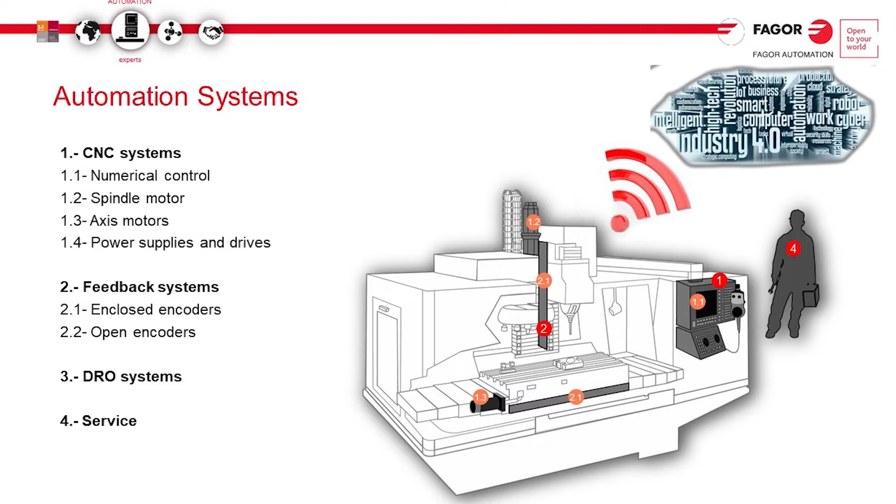But first, we wanted to further acquaint you with our organization. We are a proud member of the Mondragon Corporation, the world's largest employee-owned cooperative. We have been one of the leading providers for machine automation and control products for over 45 years. We provide CNC systems, linear encoders, angular encoders, servo drives and motors, and digital readouts, meaning we're one of the few existing companies to be a single source solution provider for both CNC controls, feedback devices, and servo drives and motors. While we have a worldwide presence, our automation systems are used by a range of American machine manufacturers that covers the entire scope of manufacturing in the United States.

Some of those applications include hybrid additive machines, mold making and deep hole drilling, multi-channel complex automation with 10+ axes, precision optical grinding, 5-axis high-speed milling, turning, and jig grinding, and laser cutting. Today, we intend to showcase some of the technology we've implemented to make some of these applications even more successful.

Now, here's Bob Miceli with advancements in control system technology. Well, thank you, Ryan. Today I'd like to talk to you about smart technology. What is smart technology? Well, smart technology is defined as a self-monitoring, analyzing, and reporting technology. It utilizes machine learning and artificial intelligence to optimize your process. How can this apply to control technology for machine tools in the aerospace, automotive, and medical and other industries? And how can it improve the process?

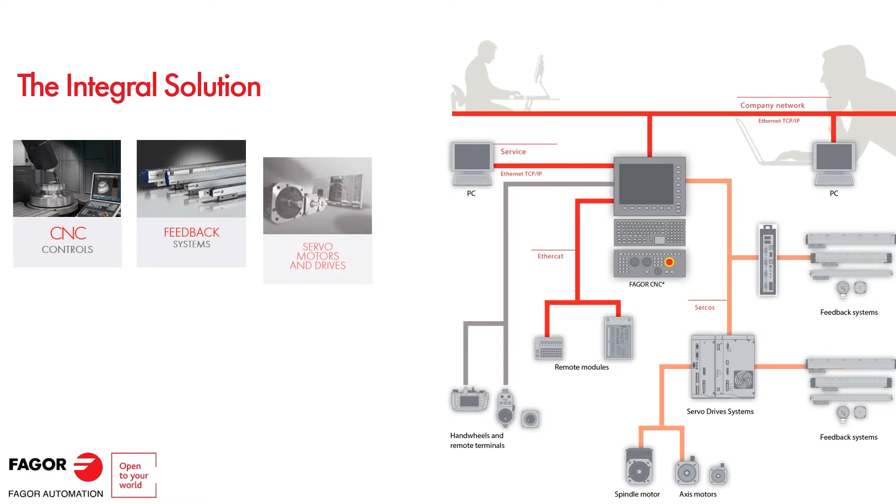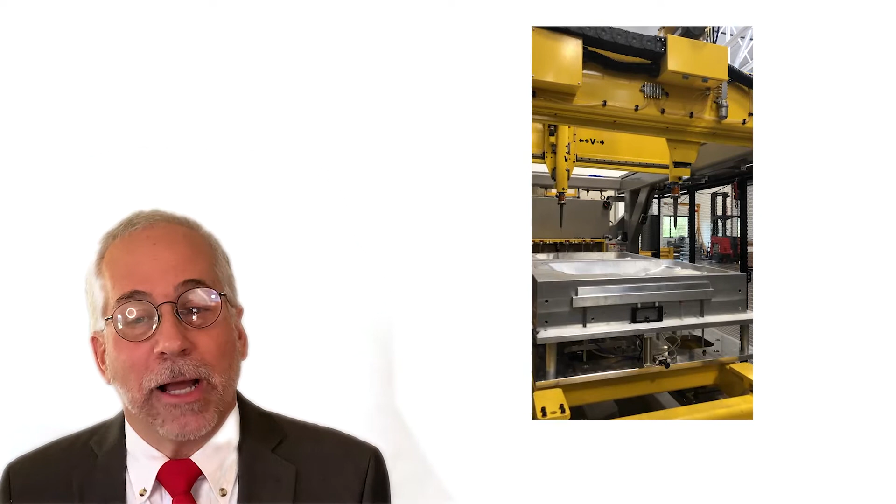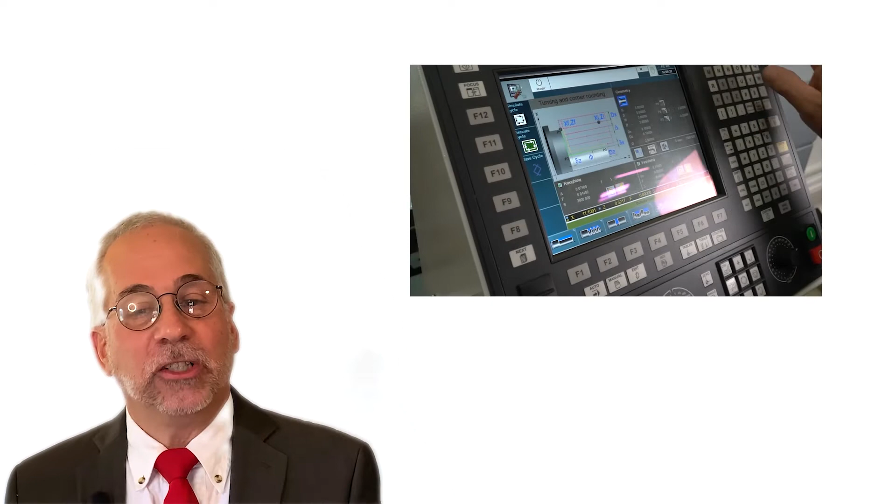Those of you already familiar with Fagor Automation know that we offer an integral solution for milling, turning, grinding, laser, and other general automation, namely by our large selection of features. Our CNC systems meet the most demanding requirements in the field, from production conversational programming applications to high-speed CNCs with nanometric accuracy. In other words, Fagor offers controls and software designed to meet high-speed machining demands for the aerospace industry to the high accuracies and fine finishes required by the medical industry.

But we need to take it further. How do we continuously work to exceed those needs? How can we put ourselves in a better technological position for the future? For performance, you need powerful hardware and software features. What do we mean by this? Well, in order to implement powerful software features, we must have powerful hardware to support it. Think about this: smartphones of today are more powerful than what your average PC desktop was a decade ago.

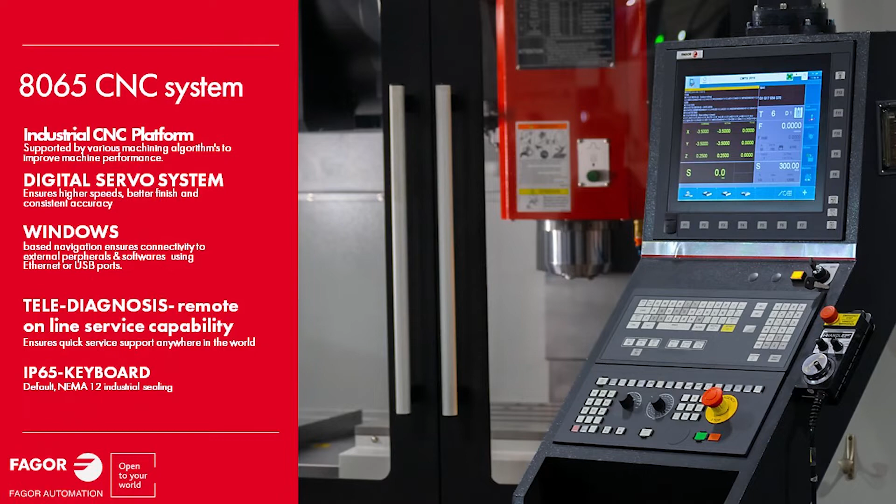Our flagship control, the 8065, has been redesigned top to bottom to a new platform. The Q7 platform is built with the current and next generation of manufacturing engineers and machinists in mind, while keeping the same goal we've always had: easy to use, and more powerful than ever, and always backwards compatible.

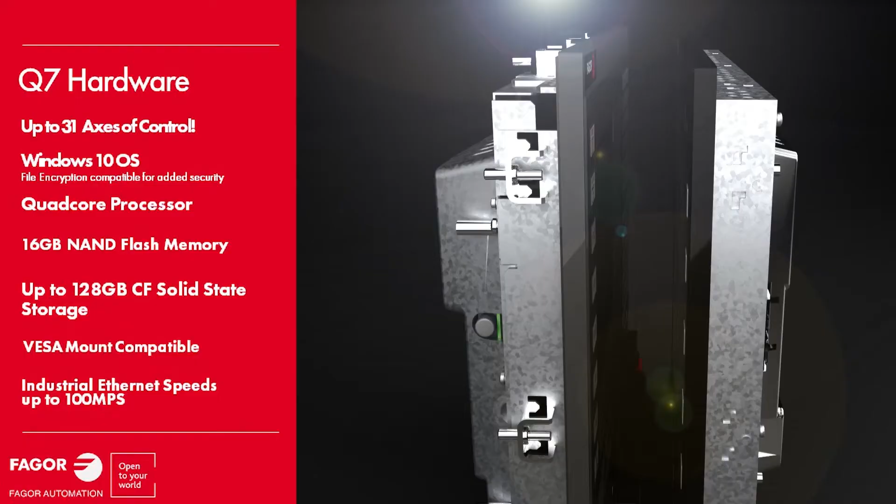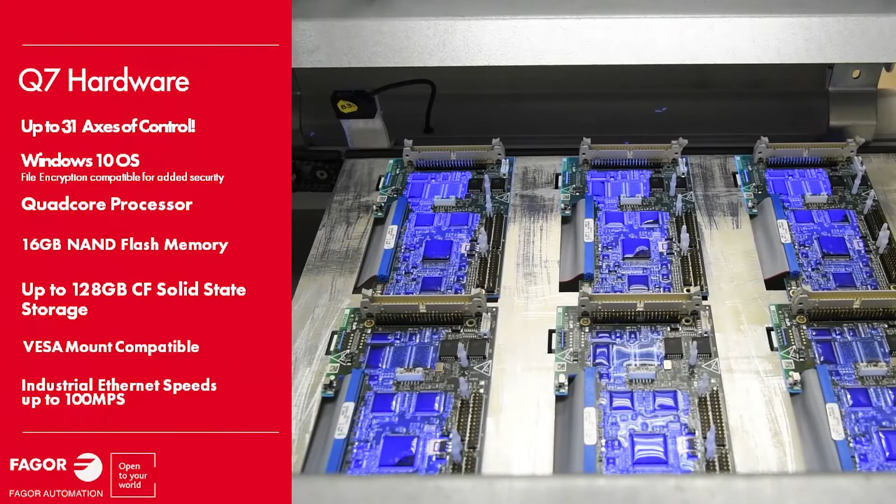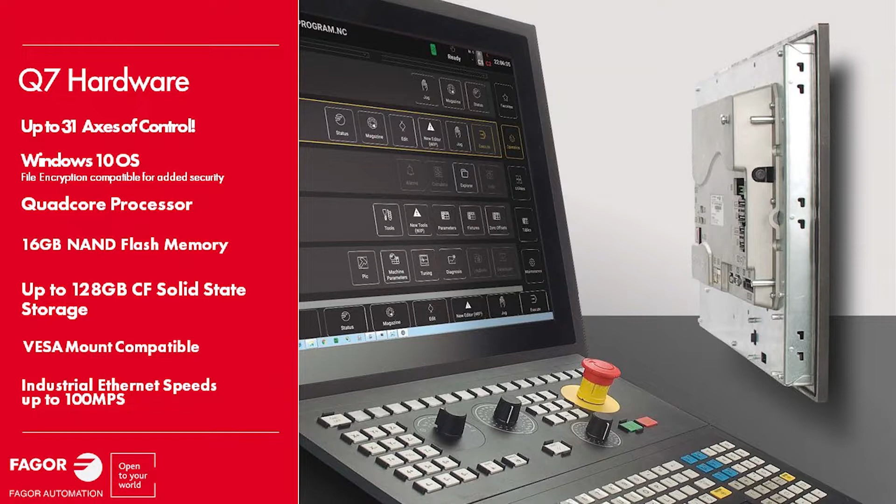Using the Windows 10 operating system, Fagor makes collecting data from your machine tools seamless and intuitive, while also keeping your proprietary data safe and secure. The quad-core processor and the 16 gigabytes of NAND flash memory ensures lightning-fast processing speeds, efficiently storing the data while running complex toolpaths. Also available, up to 128 gigabytes of compact flash solid-state memory.

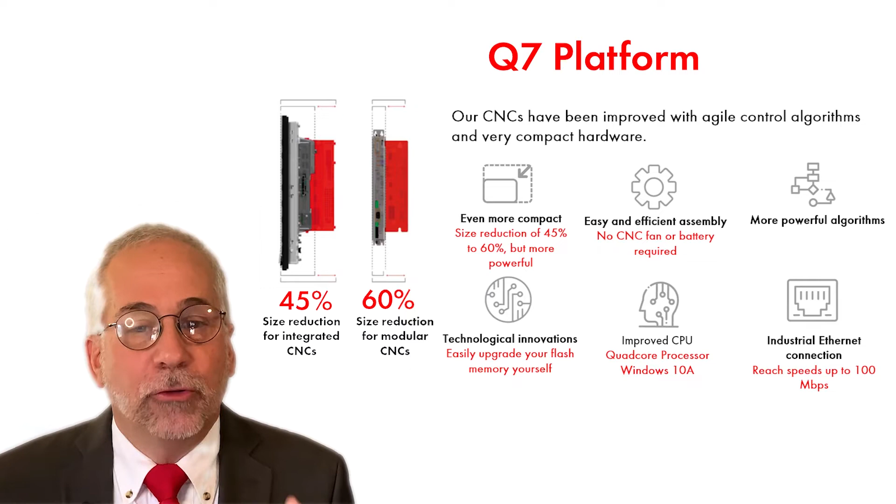Unnecessary or otherwise potentially problematic components, such as a fan and a battery, have been removed, making the overall control unit 45 to 60% slimmer.

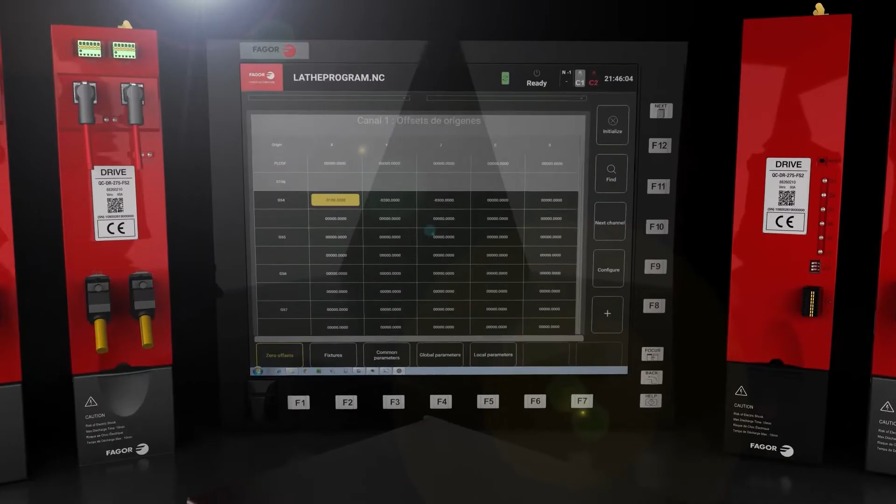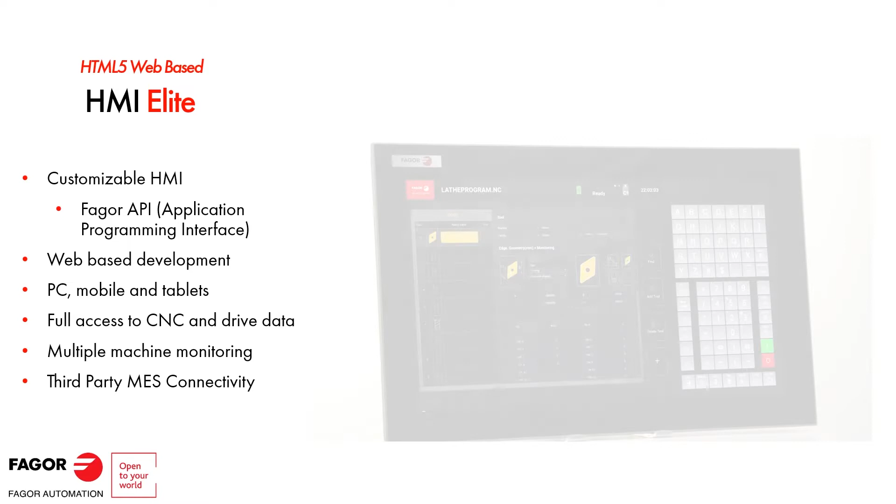Last but certainly not least, our Q7 platform has been designed to run our upcoming HTML5-based human-machine interface. This machine tool HMI is the most diverse and open platform in the industry and further enhances Industry 4.0 communications across multiple devices, such as iPhones, tablets, Androids, and remote PCs.

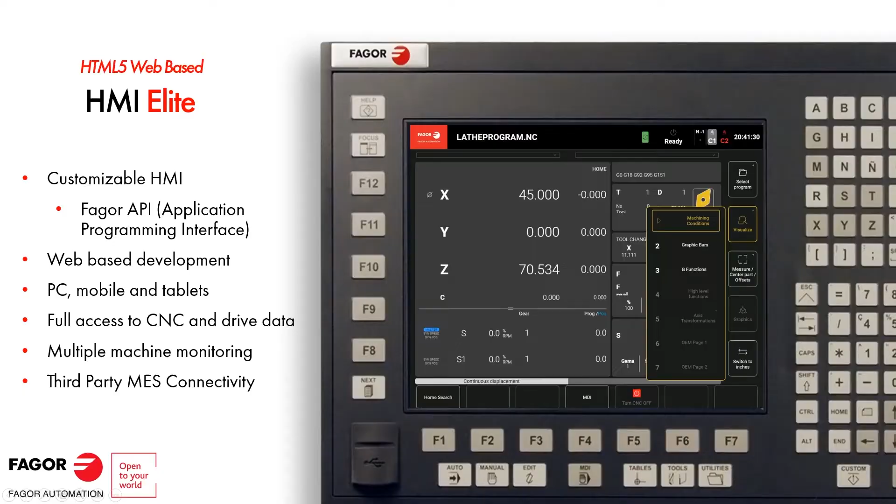Quad-core Q7 technology at its best. With this hardware, we are more easily able to run much more complex and powerful software features like DMC.

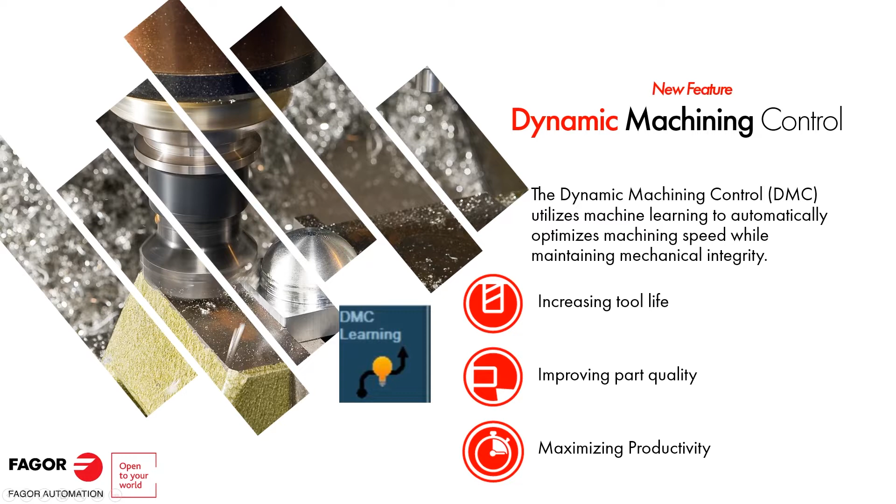DMC, Dynamic Machining Control, is Fagor's patented feature that utilizes machine learning to adapt feed rate during machining and to keep cutting power as close as possible to ideal machining conditions.

The old school way of doing this was having an experienced machinist manually turn up and down the feed rate during machining, based on how the machine sounds. What happens if the operator is handling multiple machines? What if the operator is not experienced?

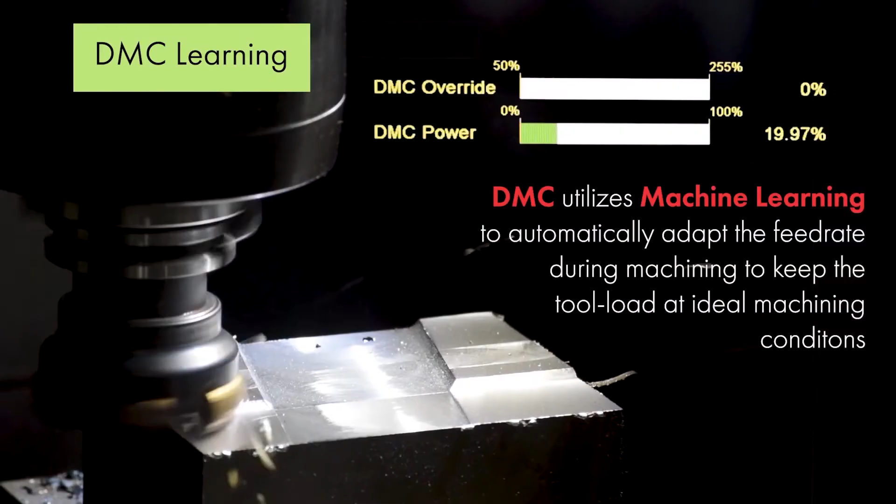With this AI-based feature, your machining center can intellectually learn the operation and set optimum machine conditions that you have predefined in your machining parameters.

This control is able to learn this by analyzing the tool load and making very rapid adjustments when more load is encountered, thus reducing the vibration and chatter, and increasing productivity.

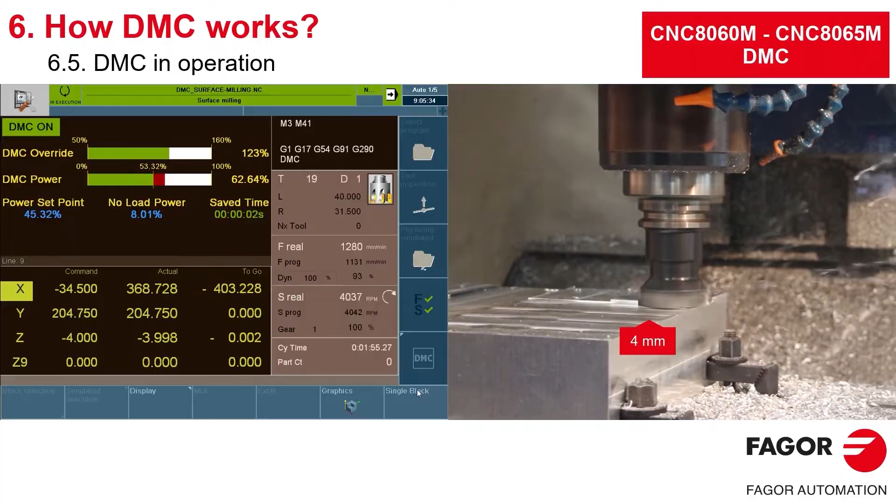DMC can be used for any milling or turning operation. It is most useful during heavy material removal processes. This is going to save time. Our customers tell us that in many machine centers, there are clear improvements in maintenance of tool and cycle time.

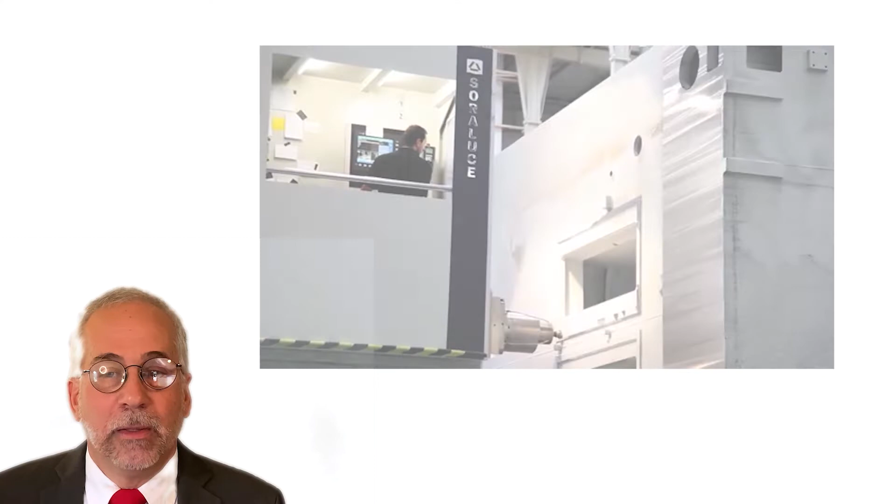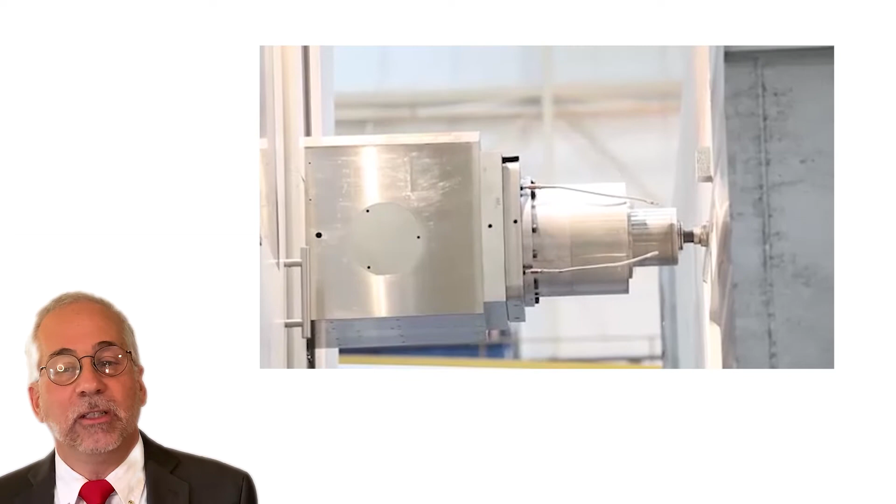I was speaking with a machine operator who clearly appreciated that without DMC, he had to stop every 1.5 to 2 hours to make tool inspections and adjustments in the tool's feeds and speeds due to wear.

However, with DMC, after 3 or 4 hours of continuous machining and maintaining the previous productivity rate, the work did not have to be stopped to inspect the tool and did not require adjustments, saving cycle time during the roughing and finishing operations between 20 to 25%.

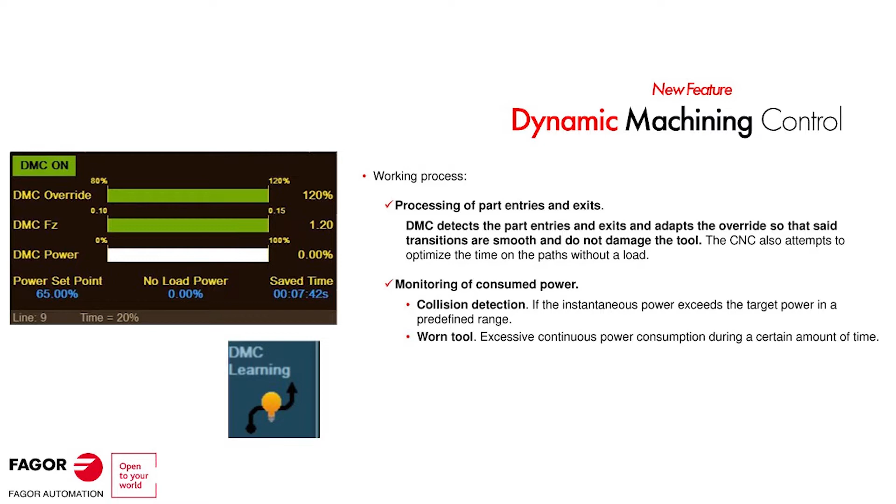This is due to a built-in algorithm analyzing spindle and axis motor loads, making adjustments to the feeds and speeds for optimum tool life and part finish.

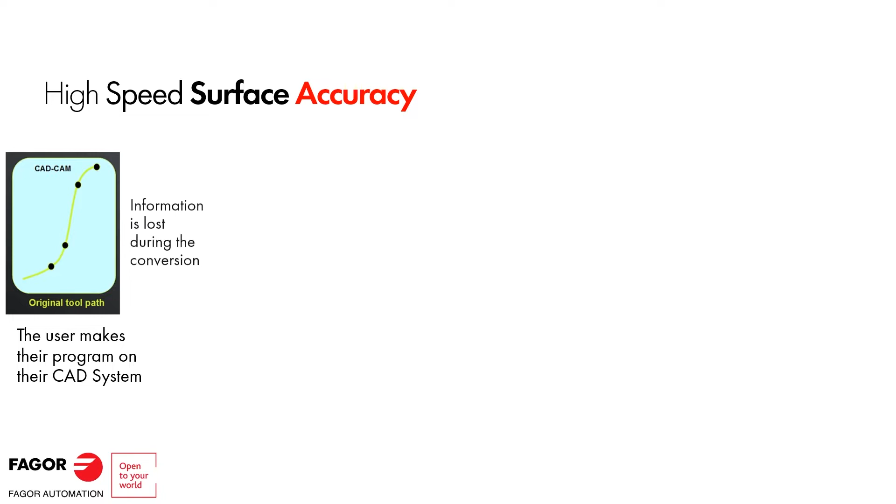Let's talk about Fagor's high-speed cutting algorithms, HSSA. Fagor's high-speed surface accuracy machining system is improving the manufacturing process. Today's sophisticated CAD/CAM systems allow the design of more complex geometric elements.

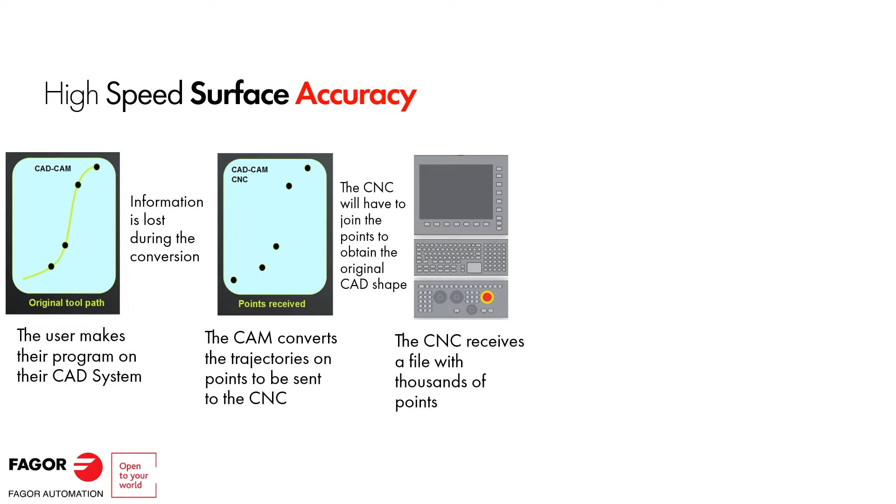The CAD/CAM system generates cloud points that must be processed by the CNC control. Depending upon the user's needs, Fagor Automation offers 3 modes where priority can be given to either accuracy, time, or the quality of part. These 3 modes include fast.

This is a method which is focused on making the parts in the shortest possible time and is optimal for roughing operations. Next, our conterror method.

Our conterror method is focused on high precision machining. And finally, surface. The surface method offers a combination of both to obtain quality parts and high surface finish.

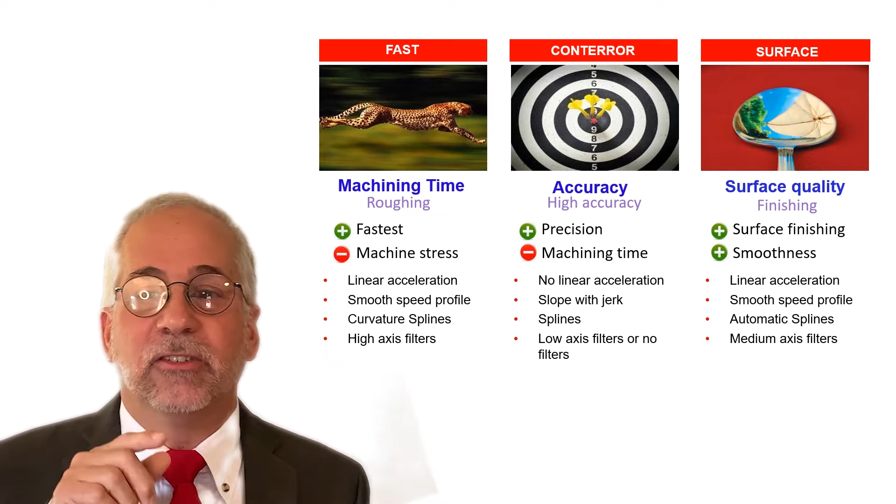Most importantly, these algorithms can be switched on the fly, and also the CNC allows selecting different sets of servo parameters to improve its dynamic behavior. Up to 4 sets of parameters are allowed. Let's talk about dynamic override.

Dynamic override allows the operator to manually adjust machine conditions in a real-time environment. As a machine tool operator, I've experienced part programs that need to be tweaked during the execution of the program.

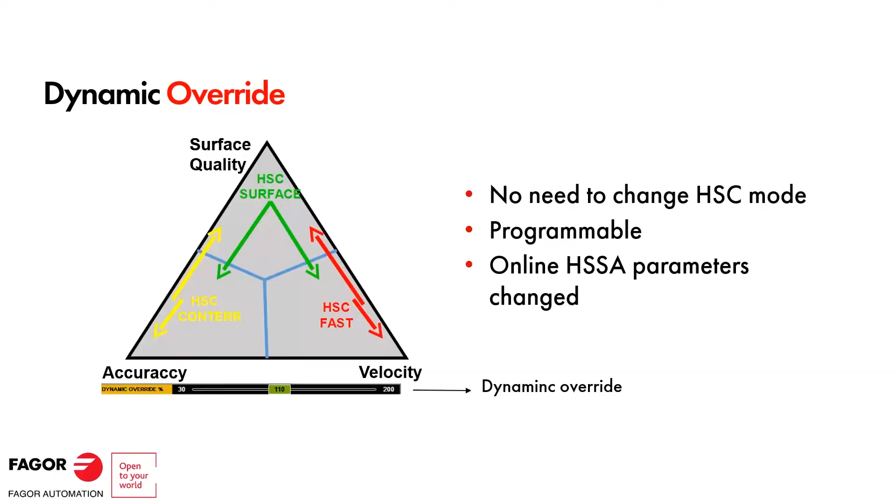Fagor has developed a simple slide bar to adjust parameter conditions on the fly. This gives the operator the ability to control part finish and accuracy during the first run. The control will store these changes and execute the modifications during the next runs if required.

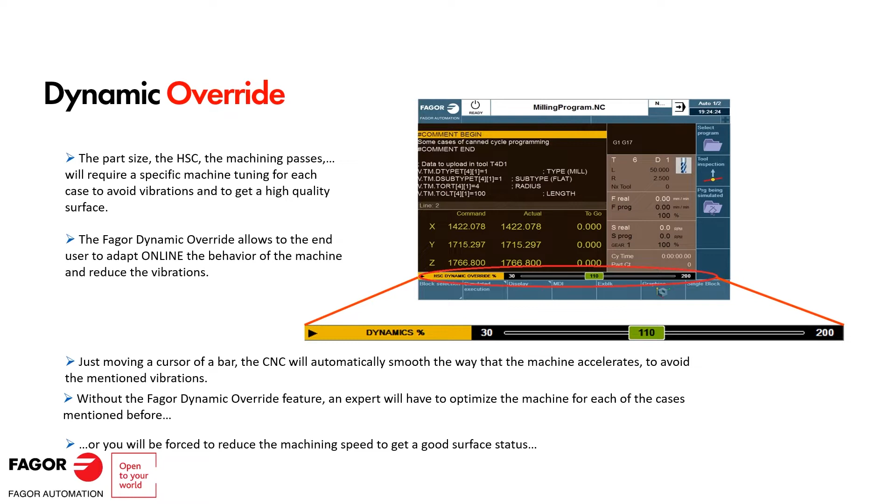Now let's talk about kinematic calibration. Absolutely critical to 5-axis machining or higher. Over time, machine dynamics change due to various reasons.

We all know this: temperature fluctuations, wear and tear, failure of mechanical parts. This affects machine kinematics and they will need to be recalibrated.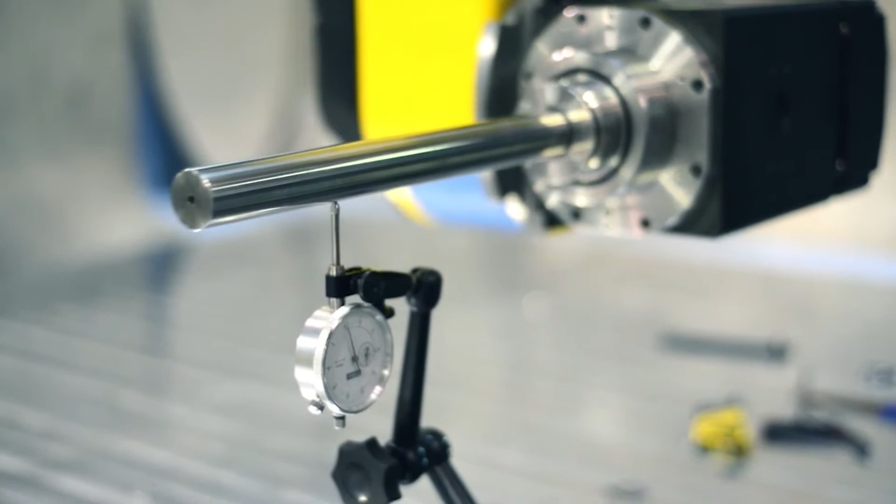An HMI has been developed for this process that is simple and intuitive. The process is integrated into the 8065 and Q7 platforms.

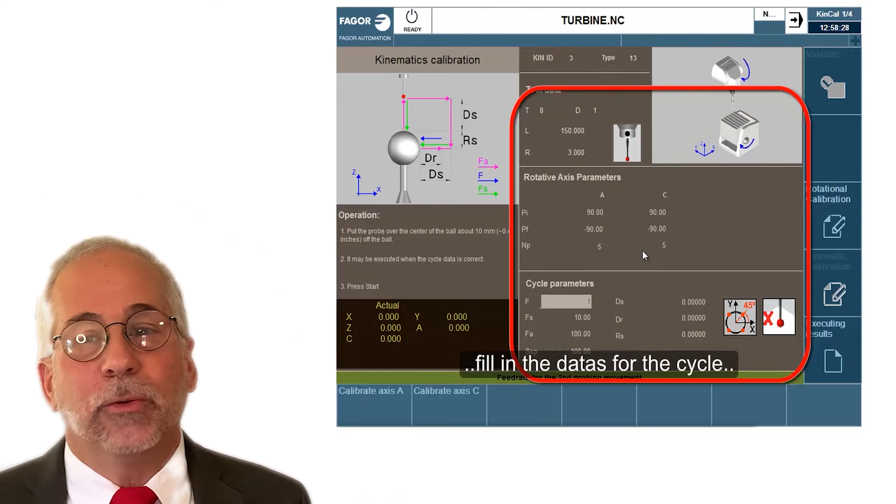It's easily condensed to one single page where the operator only has to enter a few data points and the CNC will automatically calculate the parameter values. The control does all the difficult calculations for the operator seamlessly.

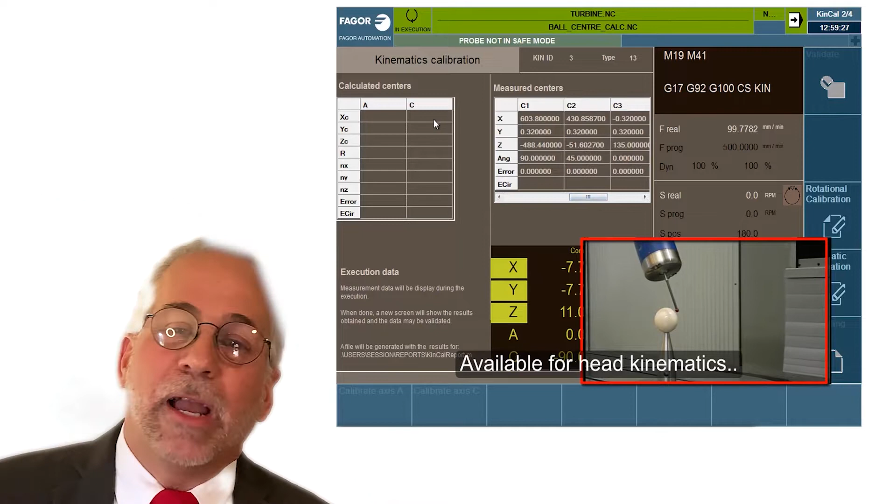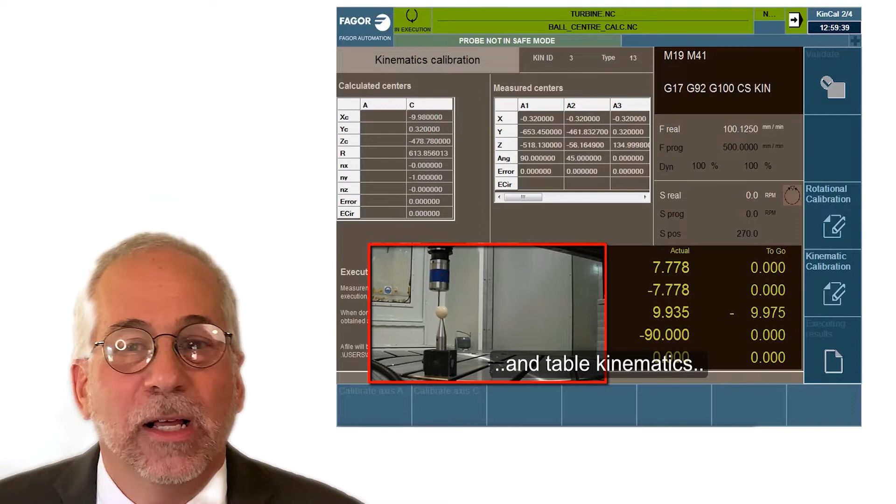We have users out there making parts that are very expensive, between $50,000 to $80,000 per part. They consider this feature absolutely essential to their process, and they're just blown away at how easy it is to use. It is also helpful for OEMs who are setting up machines for the first time.

Now let's talk about volumetric compensation. No machine tool out there has perfect geometry, and in order to achieve strict accuracy standards needed by the aerospace and medical industry, we need a machine tool with perfect geometry.

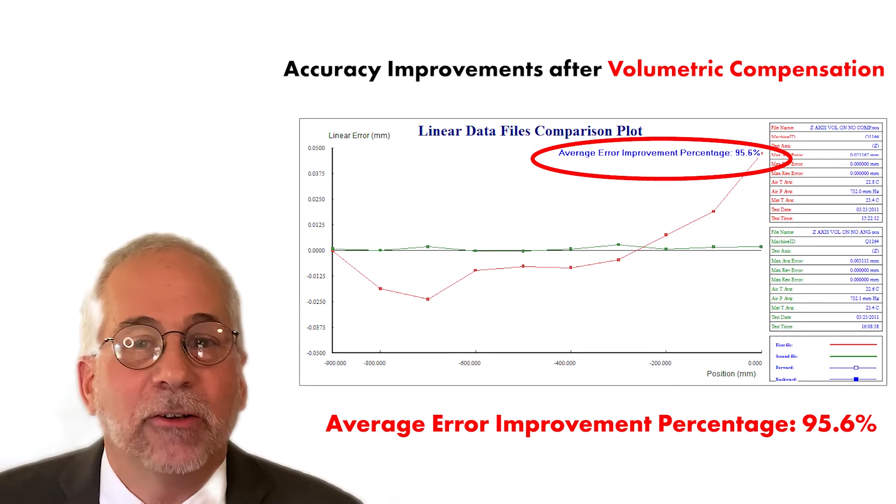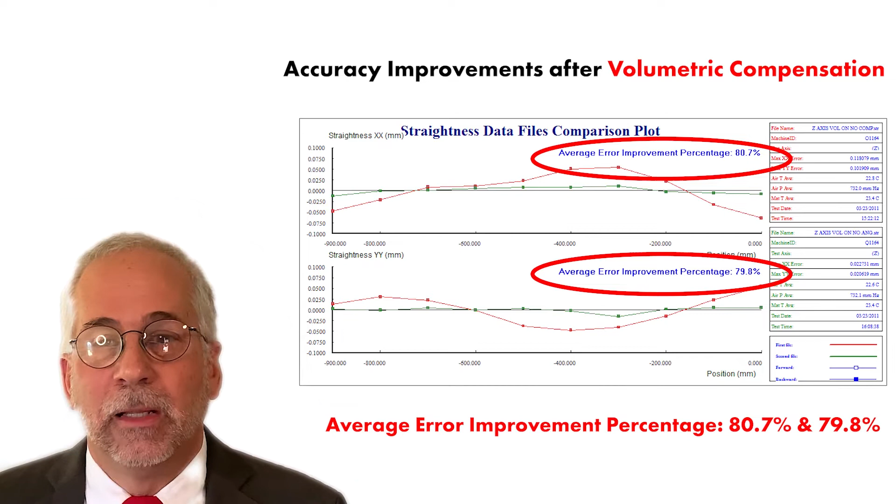Volumetric compensation allows the calculation and implementation of changes in the CNC system to achieve near perfect machine tool performance throughout the whole machine's working envelope. I'd like to talk to you about connectivity.

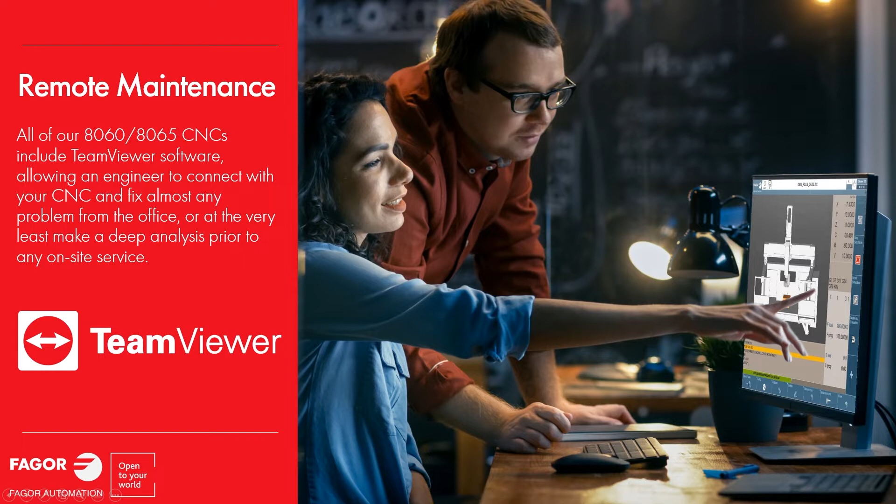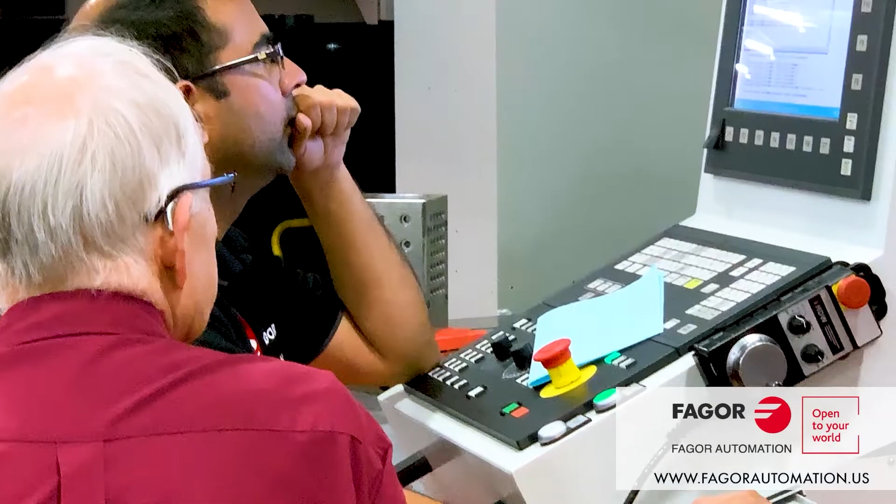Support is just a click away. In this world of the smart factory, we've installed TeamViewer software into every Fagor Windows 10 based control system. If you have a question, simply call the Fagor service line and allow the service technician to log into your control, diagnose, and possibly repair the issue without a costly service tech call. This includes tuning of the servo axis, installation of software features, and programming troubleshooting.

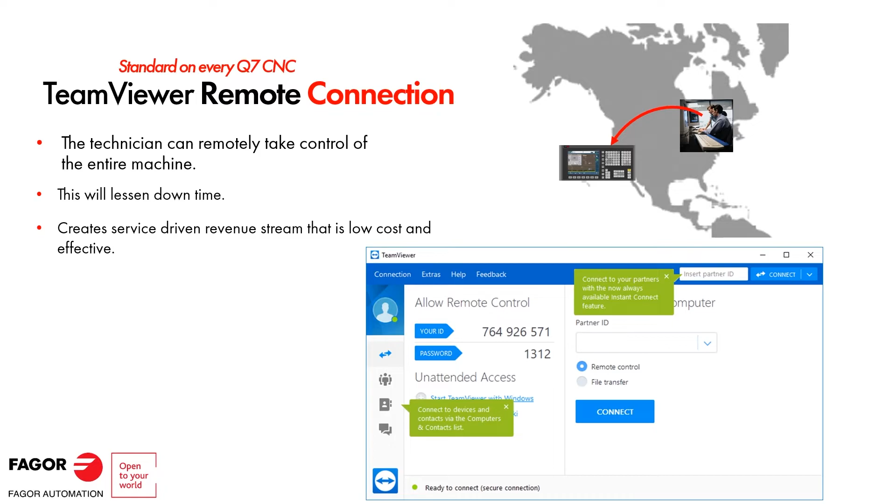Along with that, Fagor has digitally integrated their manuals into the control. Should you have a programming question or a setup question, press the Help key from the screen that you're on,

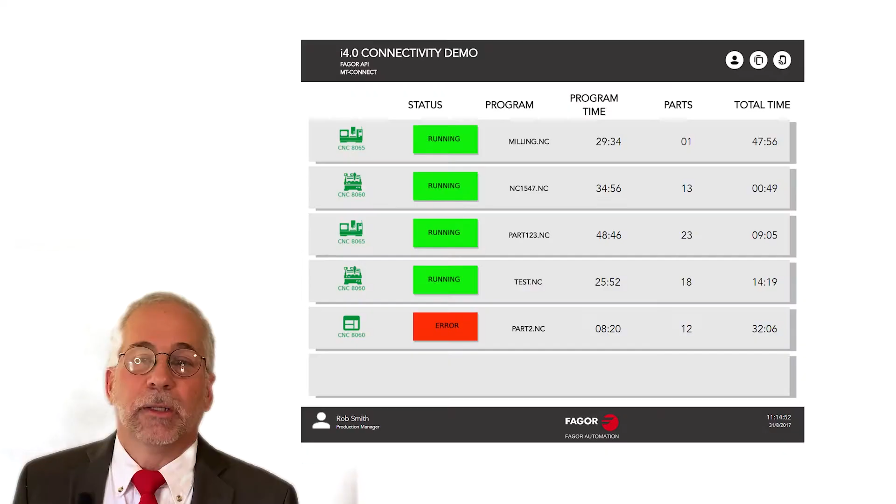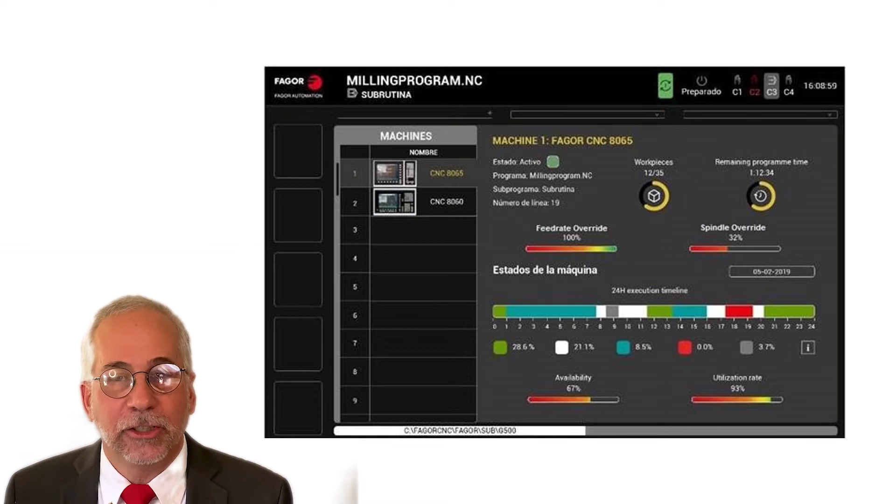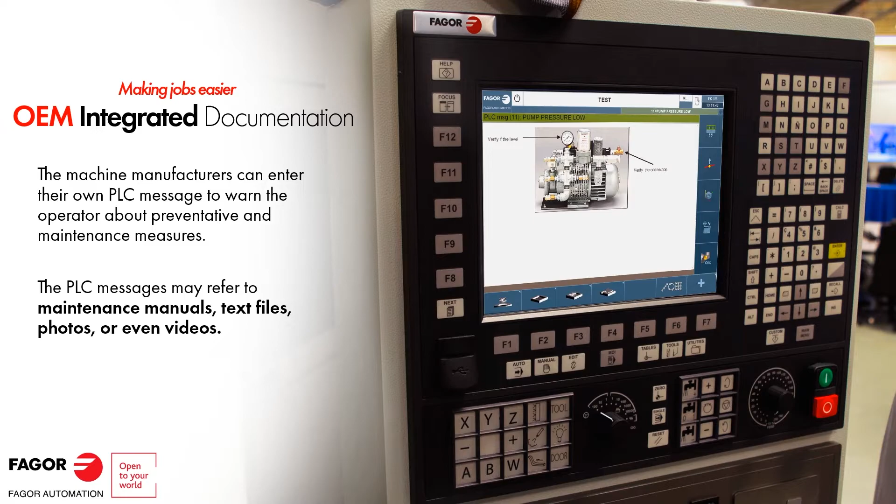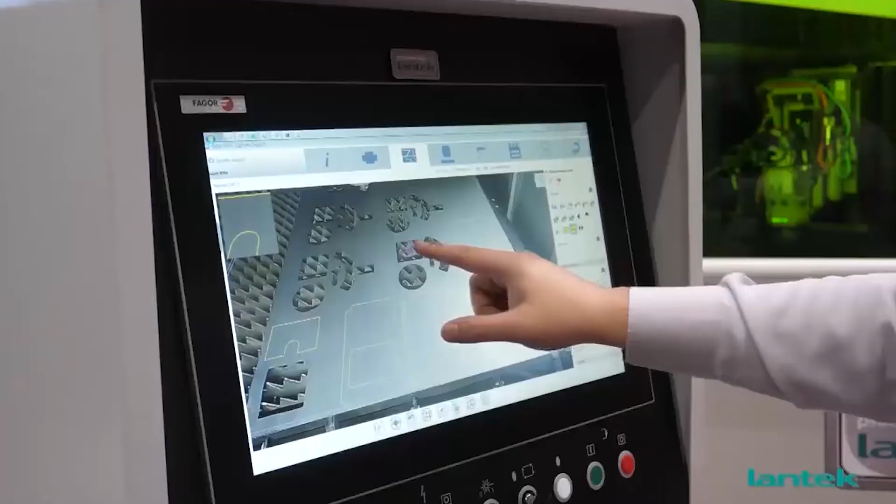and the menu will guide you through a step-by-step process and answer your questions about that operation. Our controls are open architecture, allowing the OEM to develop their own custom apps specifically designed for their machines. This sets you apart from your competition. OEMs meticulously design and polish every inch of their machine to fit the application—why should this design have to stop at the control? This gives the OEM the power to develop their own service and maintenance animations and make custom applications for the end user or in-house maintenance personnel to access right at the control. Even the end user has the power to develop or utilize third-party applications.

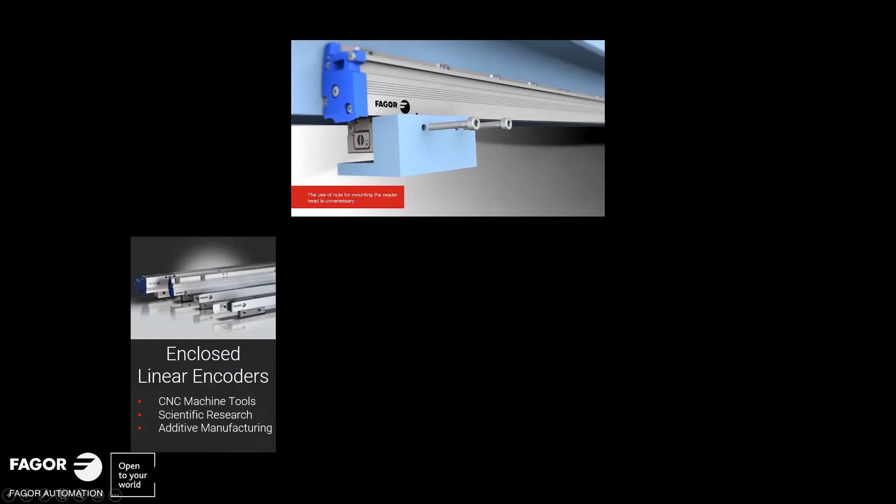Not all encoders are the same. Different manufacturers offer different encoders—there's the etching of the glass, vibration resistance, build quality, signal quality (also known as interpolation error), plus there are different photodiodes that manufacturers utilize. Fagor Automation provides a wide range of feedback devices designed to overcome these challenges: linear encoders, angular encoders, exposed linear encoders.

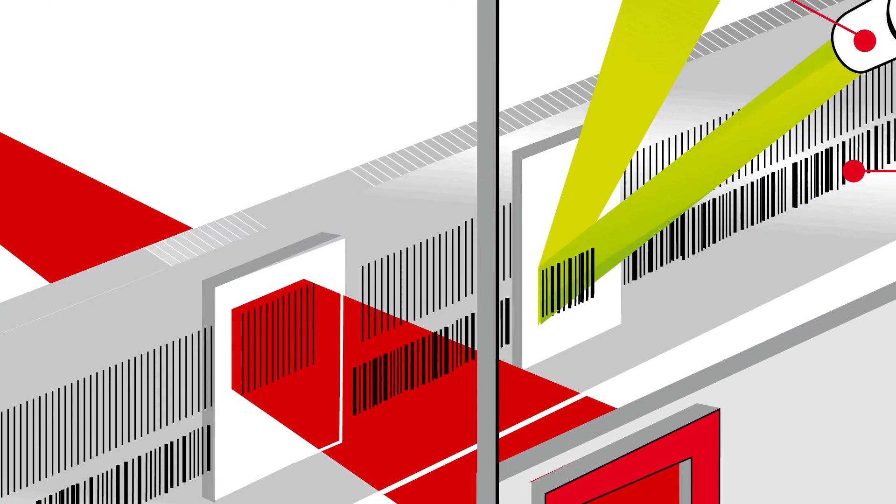Fagor Automation has developed and patented advanced technology and incorporated it into our feedback systems. Fagor encoders calculate the absolute position by reading a unique laser-etched binary code using a specially shaped photodiode with fringe scanning technology.

Fagor maintains a high standard of plus or minus 1% of the pitch as maximum interpolation error. Minimizing interpolation error is done through advanced signal processing and filtering to provide the most quality, stable, and repeatable measurement at all times. Fringe scanning technology, advanced signal processing coupled with high mechanical standards make it possible to achieve nano measuring resolution with the highest repeatability possible.

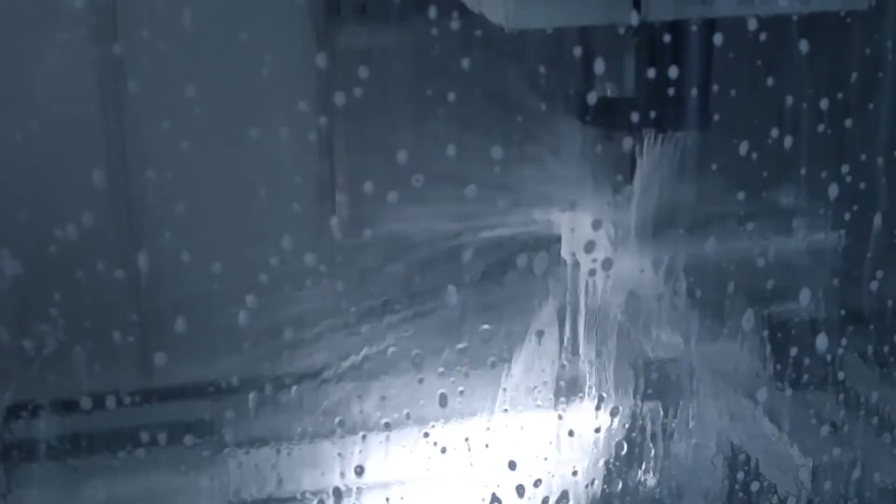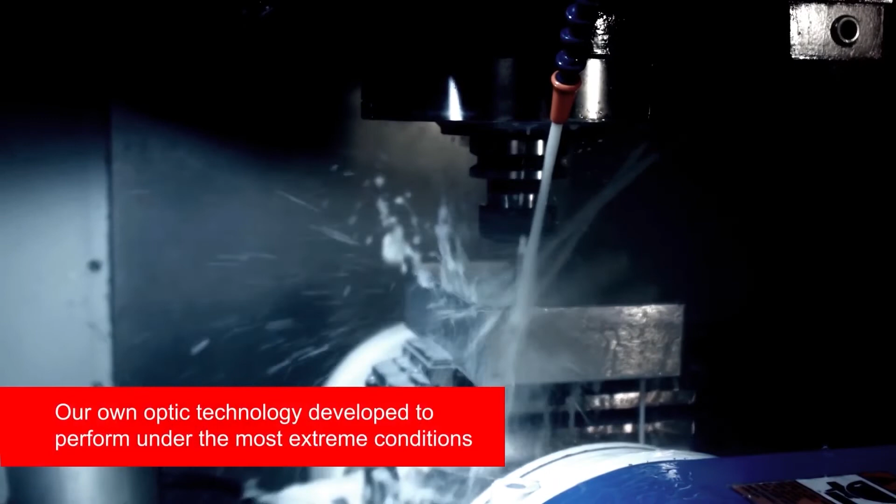However, all that accuracy that encoders provide, no matter what brand you use, can still be compromised during adverse machining conditions, until now. In the typical machining process, your production is up and running, the machine is making parts. All is good. But you might be using water coolant or oil in your cutting process. In some cases, this can eventually lead to the buildup of water contamination or condensation or even oil contamination on your linear scale. Oh no, the alarm just went off.

Why? This contamination can sometimes lead to the wrong sequence and information that is misinterpreted in the code sequence of your feedback device. Contamination has happened. More specifically, when the reader head attempts to interpret the signals, it receives a distorted pattern and cannot determine the correct and accurate position of where it is.

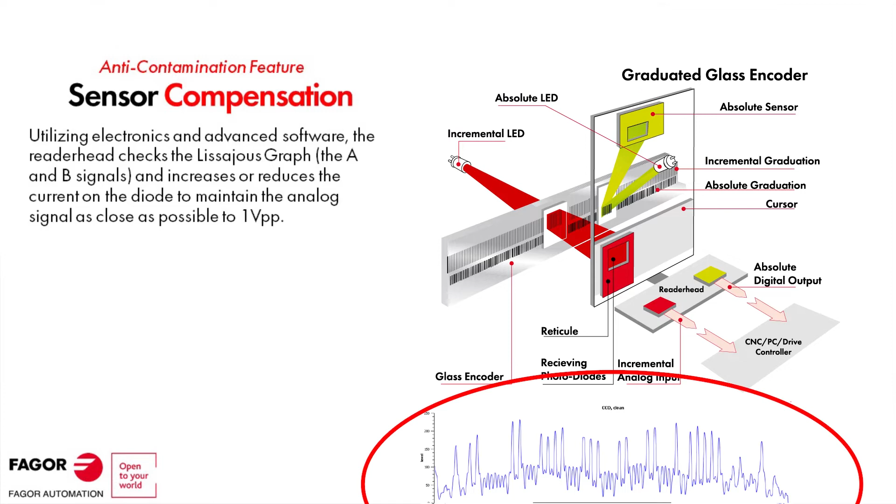Fagor Automation has two technological solutions that work simultaneously to minimize the effects caused by possible contamination. The first being sensor compensation. Advanced software and electronics self-regulate the intensity of the specialized photodiode reading, allowing it to maintain a consistent 1 volt peak-to-peak signal. So as the scale gets contaminated, the LED receives more light, more current, and it increases the intensity to read through the contamination. Fagor took it a step further and designed another solution.

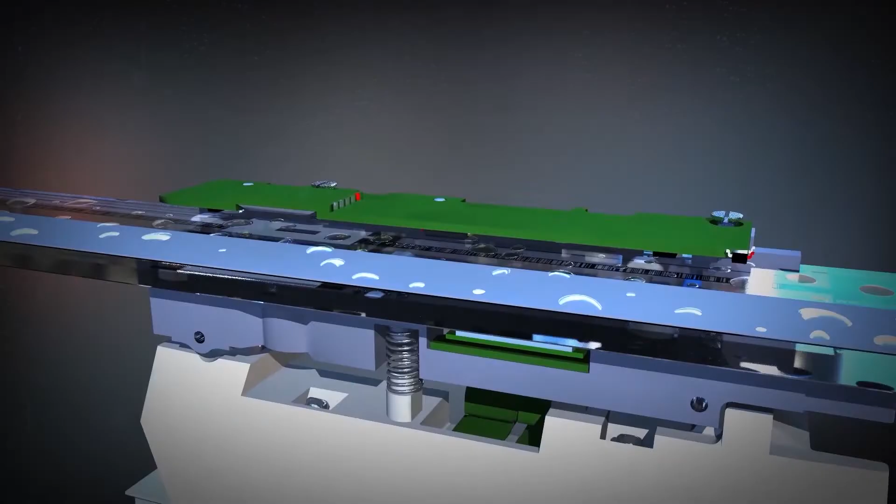A solution that utilizes smart technology called 3-state tech. How it works? 3-state technology captures a unique binary code which is laser etched along the absolute track located on the glass scale. The binary code to calculate this position is not directly extracted, but is decodified to a protected code sequence. The CCD camera captures a 48-bit scan, and it only requires 16 bits of code to calculate the correct absolute position despite not having the complete sequence, which was caused by contamination. These two solutions guarantee the correct measurement despite effects of the environment.

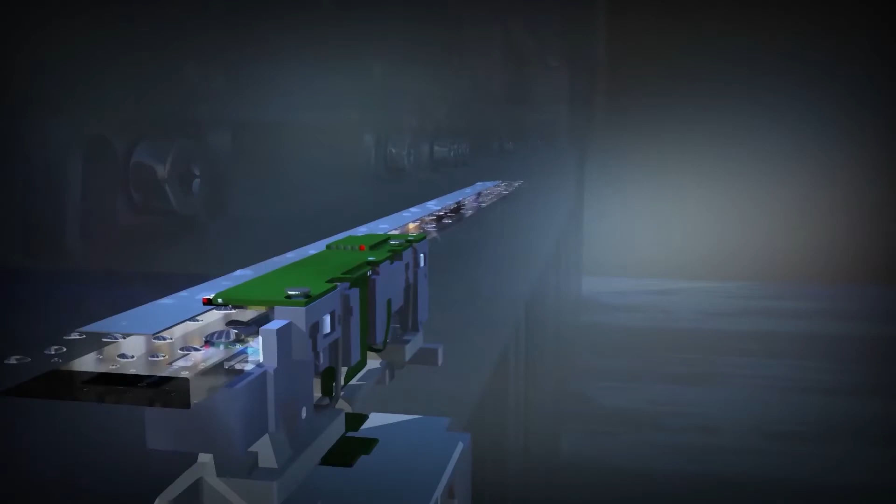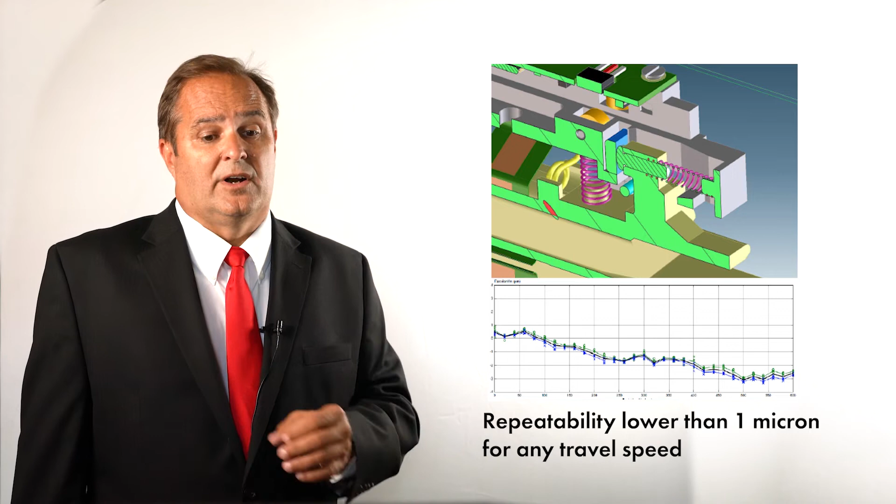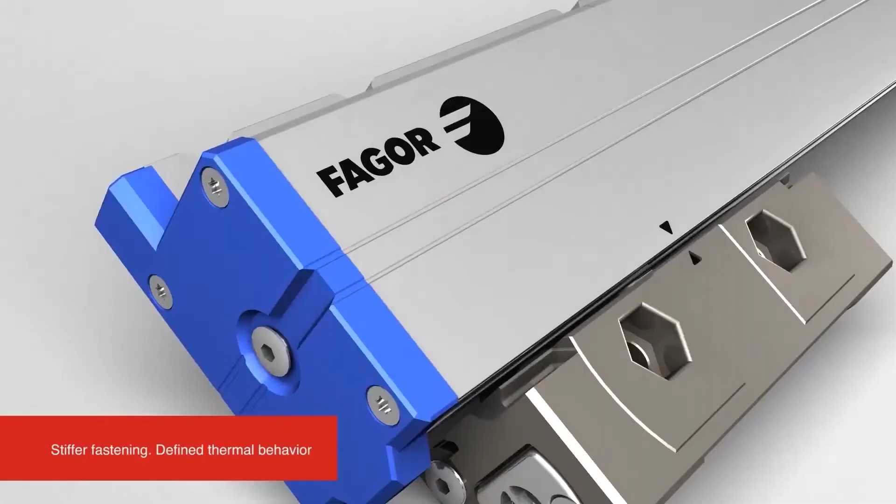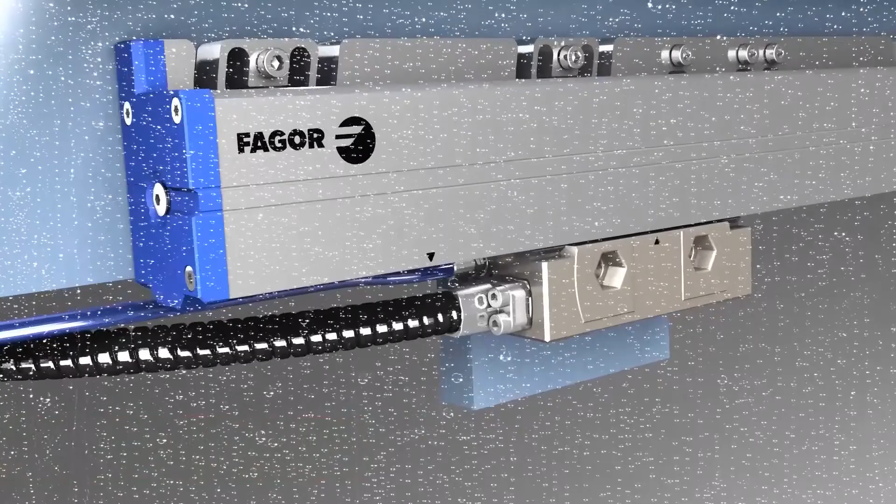With the new S3 and G3 linear encoders, Fagor utilizes a new mechanical compensation design of the reader head that offers a repeatability lower than 1 micron at any travel speed. Most machine shops do not operate in a controlled environment. This affects the accuracy of the finished part. Temperature-induced errors are further minimized by Fagor's redesigned Thermal Determined Mounting System, TDMS, which compensates for expansion and contraction. The new mechanical design allows us to uniformly torque the mounting points along the length of the scale, resulting in lower deformations on the scale.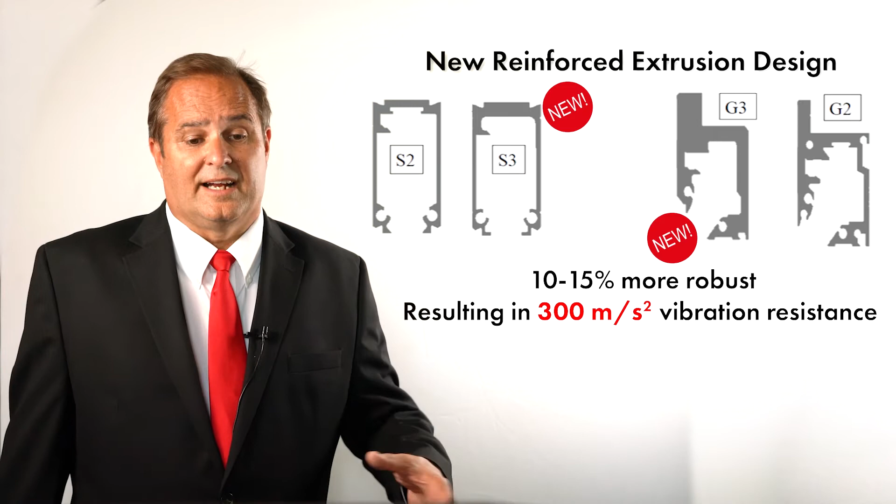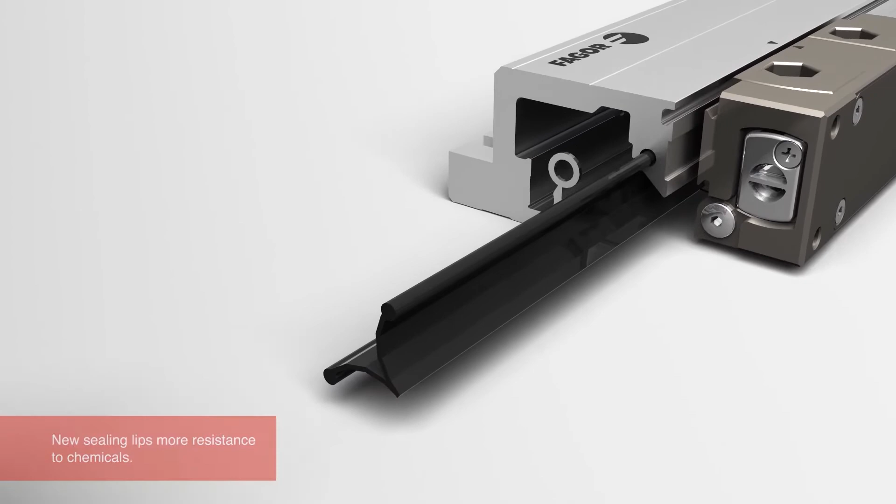The S3 and G3 have a newly reinforced extrusion design. Its reinforced design is more robust and allows for increased vibration resistance up to 300 meters per second squared. The new encoder series incorporates new fluoropolymer type sealing lips as standard. These new sealing lips are designed to offer higher resistance for all types of coolants and contaminants.

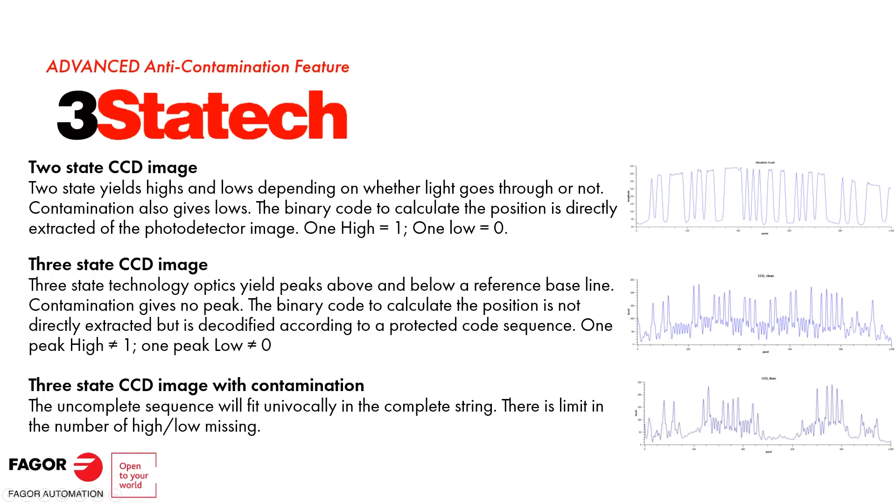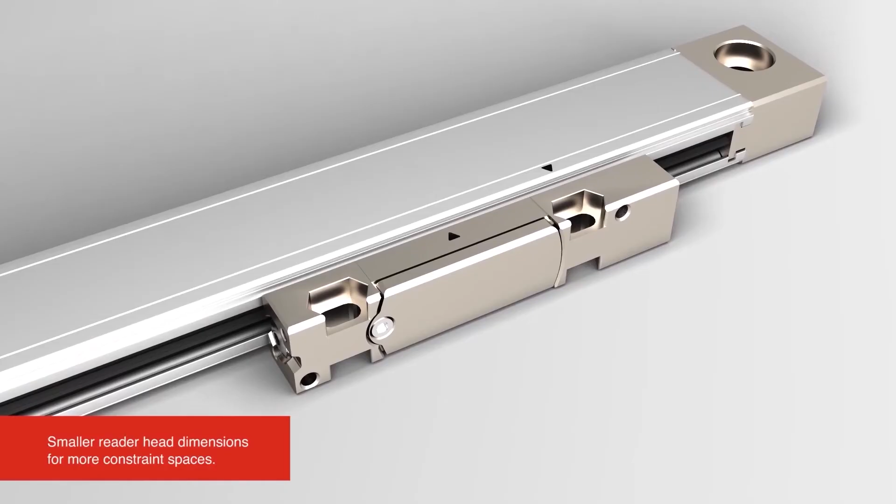Series 3 encoders cover a range of dimensional applications, specifically the S3. The S3 is designed for smaller mounting applications with measuring lengths of 70 millimeters to 1,240 millimeters. Attention to detail has also been given to the reader head, reducing the height by almost 40%, allowing a smaller footprint. There is also an option to have threaded mounting holes on the reader head. This enables the encoder to be mounted without requiring mounting nuts.

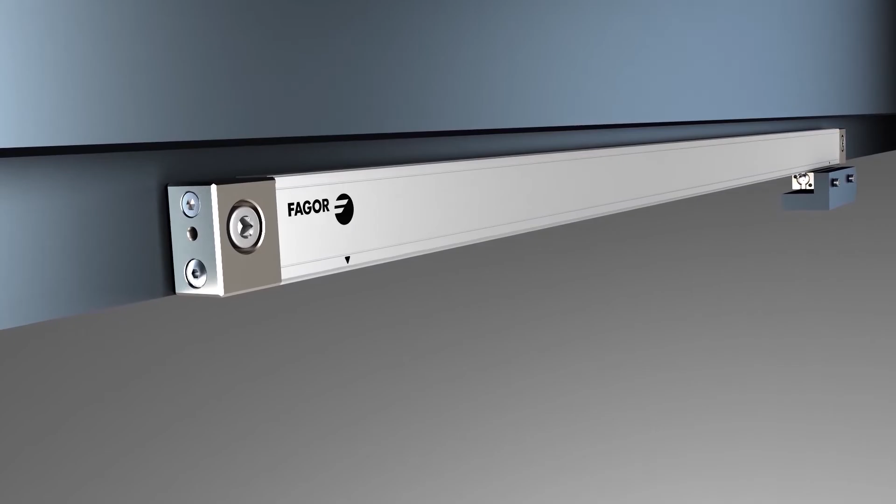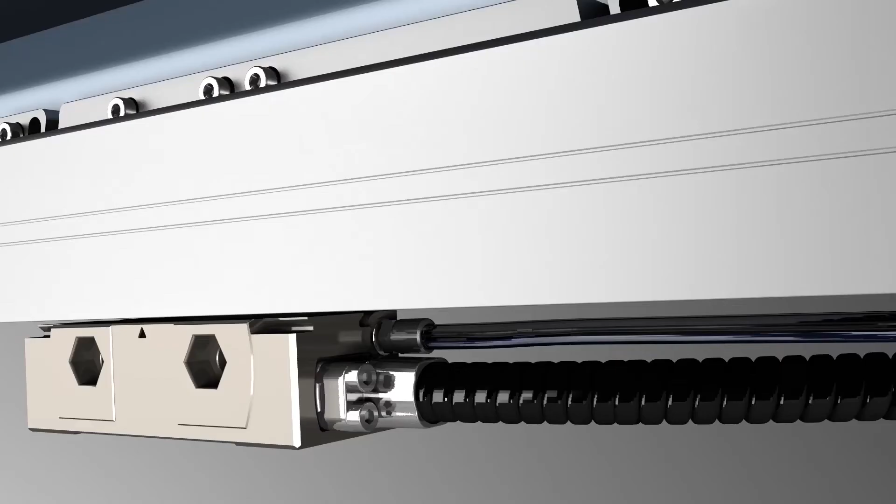The G3 is designed for wider, more robust applications, measuring 140 all the way up to 3,240 millimeters in length with a single glass scale. The reader head allows for air intake and electrical connections which are integrated on either side of the reader head, allowing you to select which side the cable would exit. Like the S3, there is a threaded head option.

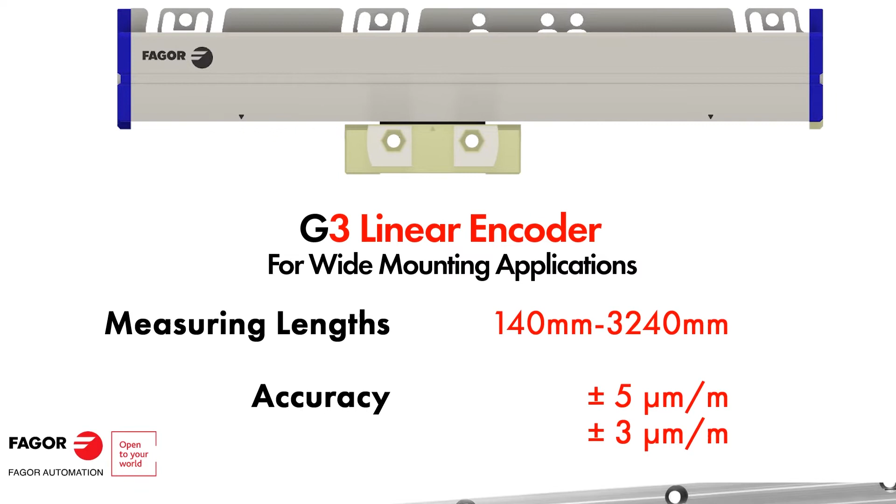Our L series completes the linear encoder lineup with an extended range modular design. The mounting length goes from 440 millimeters all the way up to 60 meters in length. Instead of a glass scale, the L series incorporates a graduated steel tape design.

Fagor offers incremental output signals. These are TTL differential or 1 volt peak to peak. There are also absolute communication protocols depending on the control system manufacturer. Fagor Automation offers different absolute communication protocols compatible with the main control system manufacturers in the market. We also provide custom protocols depending on the customer specifications.

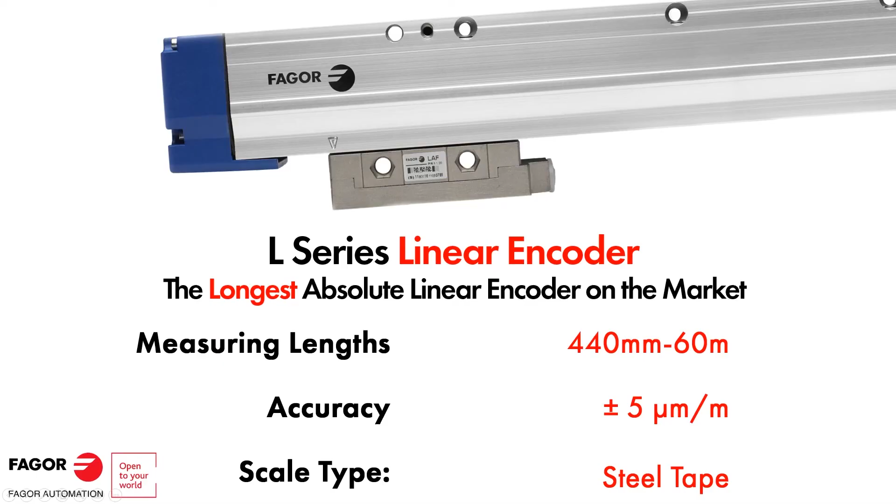So some of the characteristics for our enclosed scales are maximum speed of 180 meters per minute, maximum acceleration of 100 meters per second squared, maximum vibration 300 meters per second squared, maximum shock 300 meters per second squared.

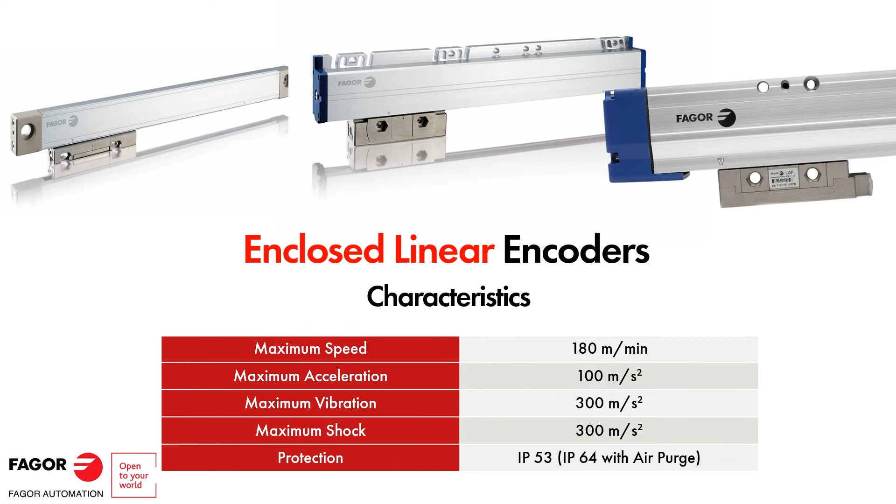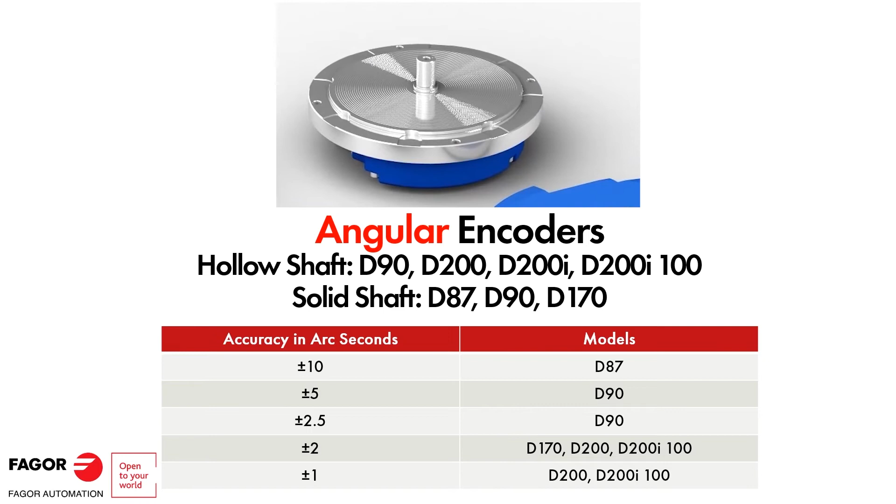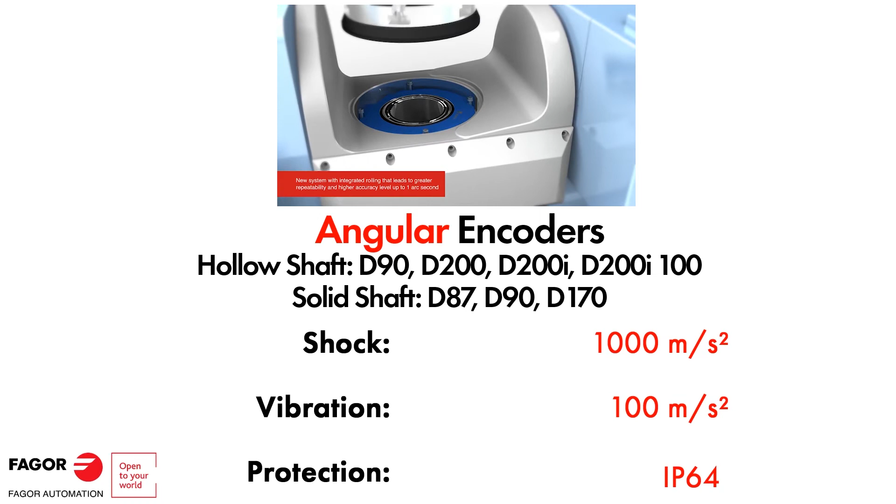And protection, we offer an IP rating of IP53, or if you add air purge to your system, we can go all the way up to an IP64 rating. Another feedback solution that we offer are our high accuracy angular encoders, available in both hollow shaft and solid shaft. Our accuracies range from 10 arc seconds all the way to 1 arc second. Shock is at 1,000 meters per second squared. Vibration 100 meters per second squared. These are also offered with an IP rating of IP64.

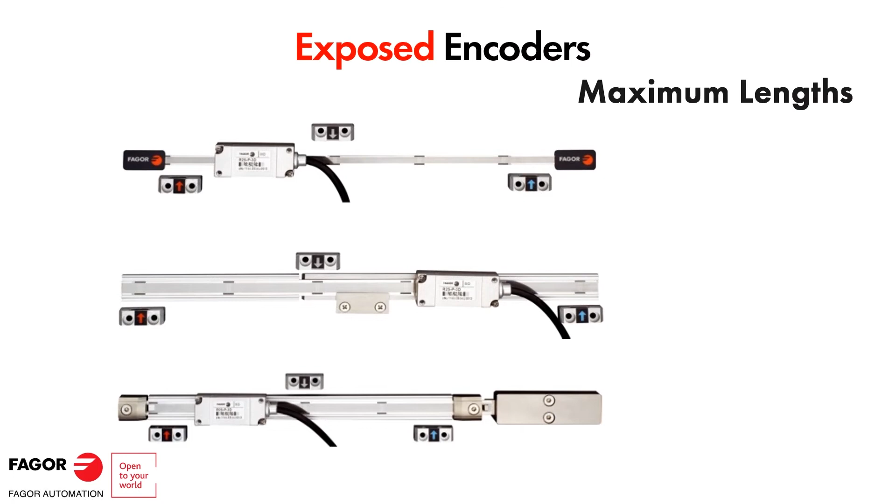Fagor Automation also offers a full line of exposed scales that are adhesive, guided, or tension type, depending on your application. Some of the characteristics are our maximum vibration of 200 meters per second squared, maximum shock rating of 1,000 meters per second squared, with an accuracy of plus or minus 10 micron to plus or minus 5 micron accuracy.

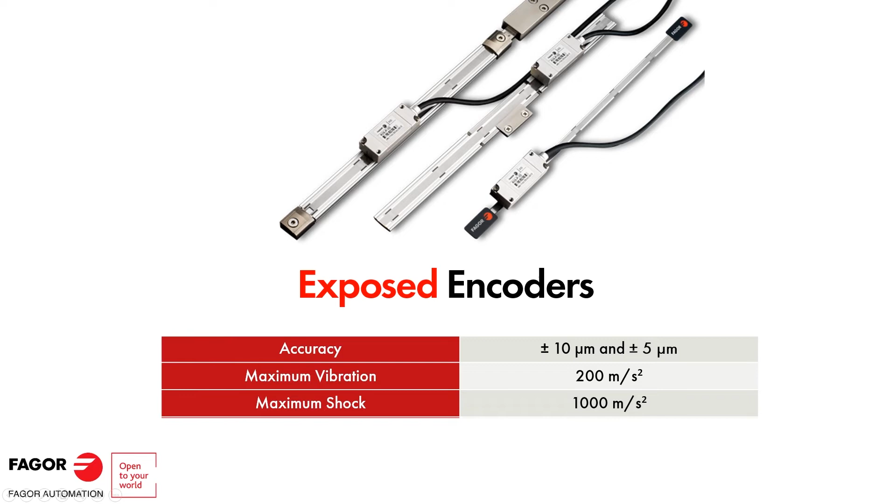Lastly, we wanted to go over the Fagor Advantage, a set of high standards that we uphold for the benefit of our users. Fagor has been providing a high-quality product for over 45 years in the industry. Fagor offers an industry-leading 2-year warranty. OEMs specifically can take advantage of up to an additional 12-month grace period, effectively extending the warranty to a full 3 years. Our products are guaranteed to be delivered in 4 to 6 weeks.

And Fagor understands that customers require their products on time, so we cooperate with our customers based on their sales forecast to stock products they need at our Chicago facility. We have the flexibility to customize our feedback devices based on the customer specifications. And finally, Fagor prices competitively with the other encoder providers with the goal of generating savings for your business.